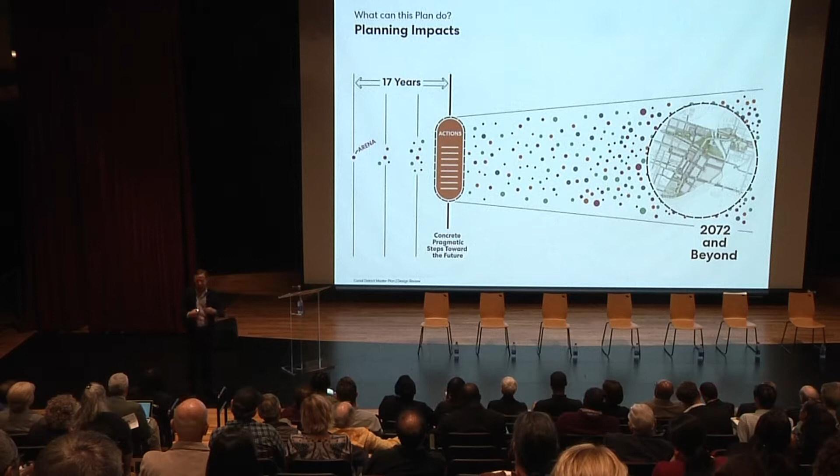So we're sowing the seeds for long-term growth, which I think is an important thing to consider, particularly if you'll entertain this abstract diagram for just a second. At some point there was one idea, one decision, and that was let's get an arena and let's put it where it was. We've been in 17 years of some incremental decision making, but there are thousands, maybe millions of decisions that have to be made before the district is fully realized.

We think it's really important, it's hard to figure out all of the things that need to happen in the middle, but we think that having a very good vision in place and a set of actions for tomorrow or for December will ensure that you can get yourself on the right path to developing that.

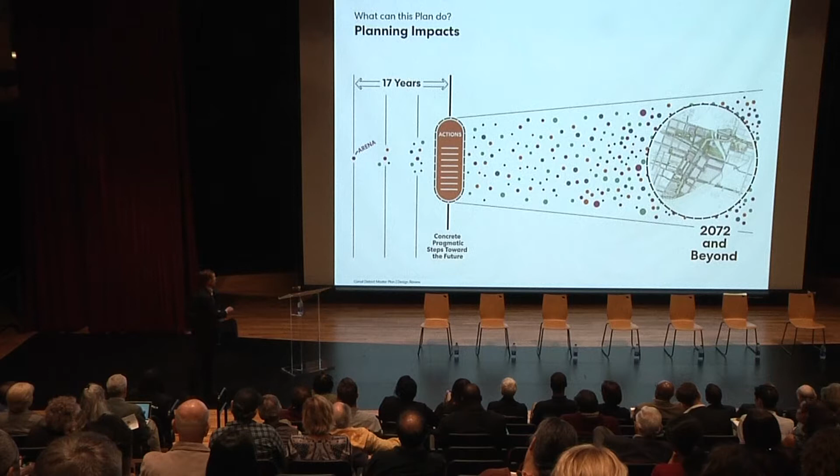So we have 20 actions that we want to talk about tonight, and I'll highlight a few of them at the end of the presentation.

We think that there are policies around how we guide the growth of the district, how we ensure that people are protected and supported, communities, how natural systems are elevated and not hidden away, are not further degraded, and then policies about how we create places for people in a wonderful city to live in.

And so from there, we have these actions. There are 20 of them, and we think there are 20 critical next steps for the project. These can be hotly debated, and we will do that.

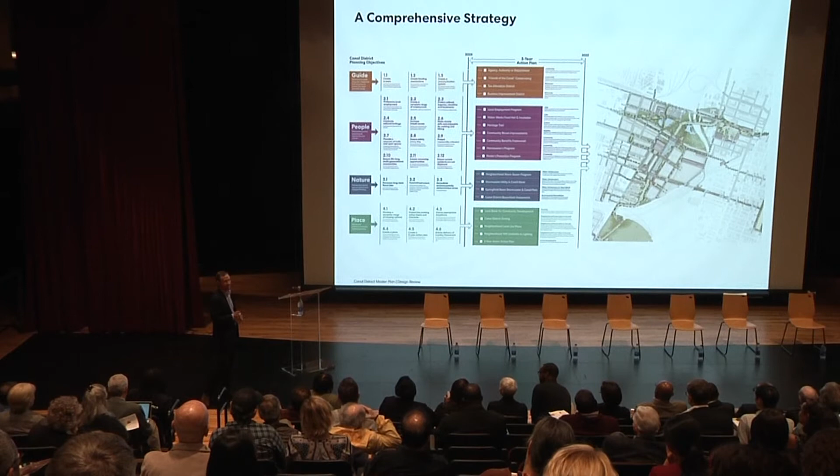Do you want to advance it up there? There we go. All right.

So if you've been to any of the Canal District meetings, we think we hear a lot about the past, and we think that there's some value in thinking about why this area of the city is the way that it is.

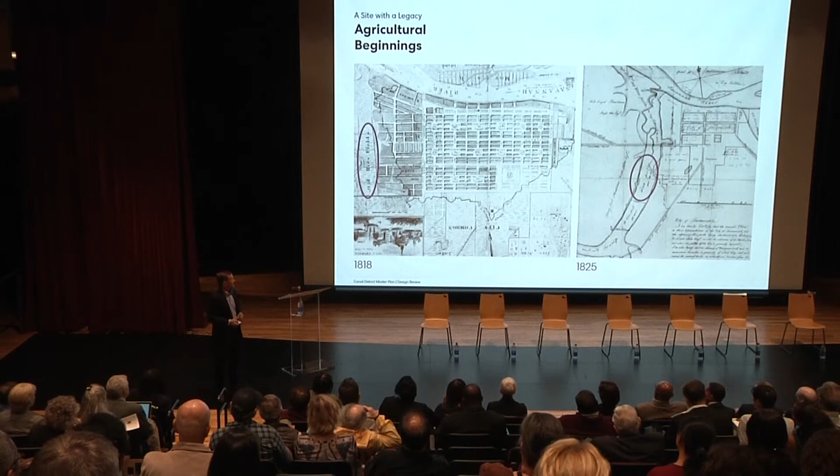Is there another one of these up there? So rice plantations, there were yellow fever epidemics, which many of you know about, and the Springfield Canal was built to drain this area to move the wet culture of crops away from the city, to move mosquitoes away from the city.

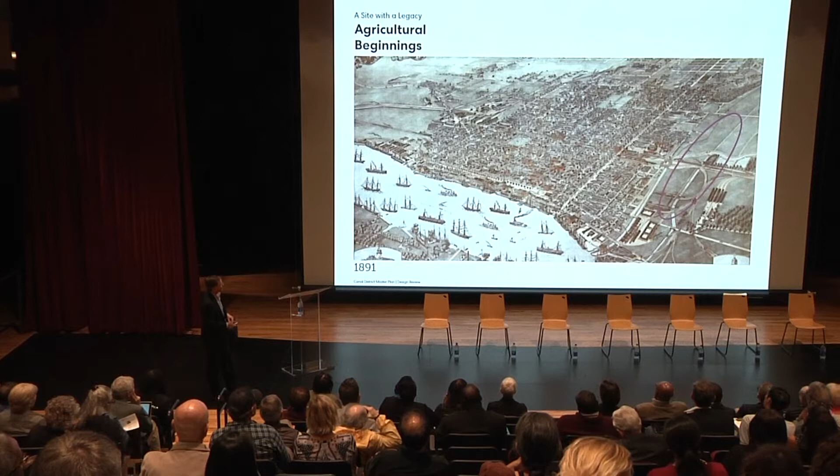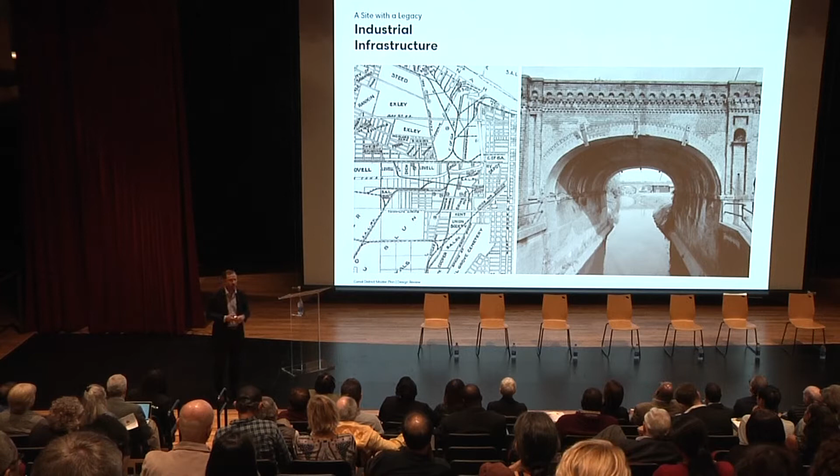This is the viaduct that's along Louisville Road, where the Springfield Canal cuts under there, going north to the river. There's also a social legacy here in place that we know is incredibly important and partially divisive in the city, but also an incredibly important basis for what you grow a community on.

And in this case, in particular, African American home ownership. There are multi-generational households that still own houses that they bought in the 1940s, and that's something for us to protect and celebrate.

Carver Village is not the only neighborhood here. There is a patchwork of neighborhoods on the west side that we think, through the development of the Canal District, there's absolutely no reason any of these neighborhoods, anyone presently living in these neighborhoods, should be displaced.

There's no name, cultural identity, anything in these places that we think is not absolutely in accordance with what the Canal District can be. So that's on the table, and we have policies we think can help support that.

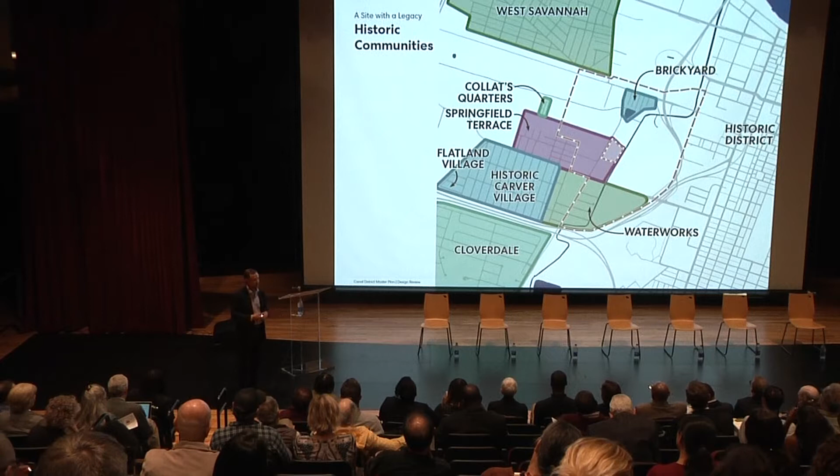So there's these three histories that weave together: social, natural, and physical. And you can see it in the city itself, and it's sort of amazing to see, the historic district and then the patchwork of the west side, and the very intentional intrusion of a large piece of highway infrastructure that's dividing the city in half.

And so there's wetland here, there's industry, and there's infrastructure that just sort of reinforces a cultural divide that's been in place forever in Savannah. And so you could say there are many different Savannahs. There's historic Savannah, and there's West Side Savannah.

There's very public history that people travel all over the world to come and visit. And then there's sort of a hidden history of the West Side that we need to bring out and express and celebrate. And in the middle, dividing these two, at least these two Savannahs, is all of this infrastructure.

And so if anything in this process, what we're trying to do is figure out a way to take the issues that are central to this project, infrastructure, water, new places for people to live, and use that as something that helps knit the community together so that we can start building one Savannah, at least in this district. So this is a central part of where we're coming from.

We think that in moving forward in the spirit of this one Savannah, there's the opportunity to create common ground here, in particular through these different systems: social systems and natural systems, and new places to host civic life. So that's what we're going to go through. I'm going to run through a series of ideas that we have about how this could develop.

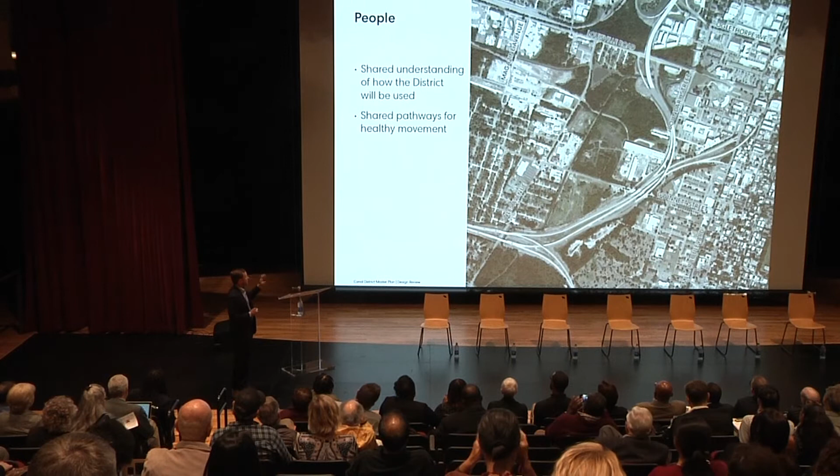So what's behind that drawing that you saw out in the lobby? We're looking at an area that's not a blank slate. These are our hand drawings, these are early ideas. The first one is that there are absolutely places that have to be protected.

There's the Waterworks neighborhood east of Stiles. There are pockets of Springfield Terrace west of Stiles. There's the entirety of the Brickyard neighborhood that sits within this orange boundary, which is what we're studying in the Canal District. There's no reason those neighborhoods need to go anywhere. So we want that. We want this plan to help support that.

And so the houses that are there, we think the houses should be there. We think more houses should go on vacant lots, and these neighborhoods need to be supported and reinforced.

There are also historic structures throughout the district. Not a lot, but some very significant ones: bridges, railways that we think could be repurposed. The Waterworks building stands out, as does the old Pearl Smith School. These are real foundational elements that in the long run will thread history and character through the Canal District.

After the places we protect, we think there are places where nature needs to be rebuilt and celebrated. In particular, there's large patches of habitat and wetlands in the north side and also in the southern portion as the Springfield Canal comes from under the highway from Cloverdale. We think at least in those places that nature needs to be rebuilt and people need to be given access to that space. I'll show some images later.

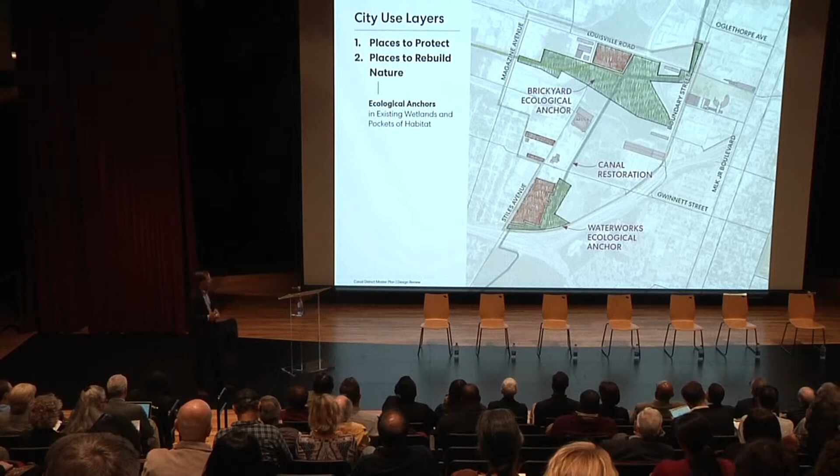And the canal needs to be cleaned and restored. The water is dirty, it needs to be cleaned, the banks are crumbling, they need to not be crumbling. So at a minimum, those things need to happen. Many of you know this, but some of you maybe haven't walked all through this area of the city. But there are amazing moments, and there are also some very degraded ecosystems.

This is in the back of the Brickyard neighborhood, and many of you know the viaduct and the canal there.

In addition to these natural places, a lot of water flows through this area up to the Savannah River. We think we need to support that and support natural systems, but in the center of this place, in particular next to the arena, we think there needs to be a new civic space for the city, a different type of park, a gathering place, something as significant as the other great parks in the city. It just so happens a lot of water is running through there, so that needs to be a place that also supports the flow of water and ecosystems.

So we have some ideas about that. That idea of a civic space has always been a part of the arena ideas. This is the current design of the arena itself from sort of this point up. This point down is still being designed, but we think this, in addition to space on the other side of the canal, has the opportunity to be something really glorious.

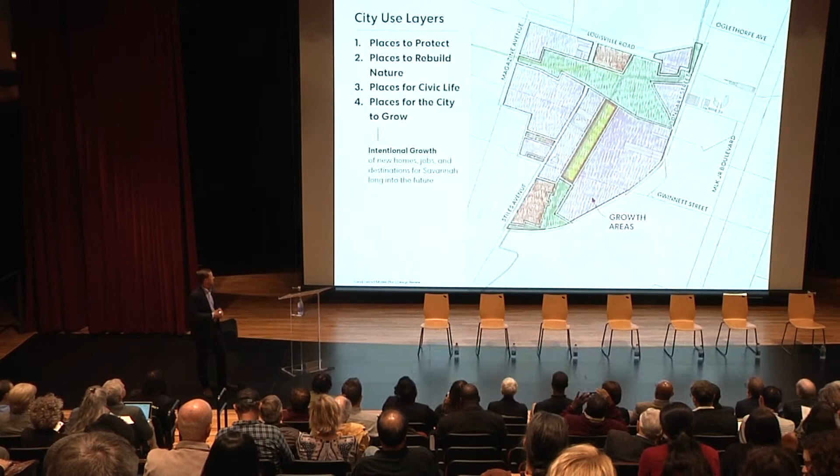Around that framework of protected places, natural places, and civic spaces, we think there's a lot of area for the city to grow long-term. This is a place that if we can handle stormwater correctly and build a civic foundation, the city can grow here. That means new places for people to live, new jobs, new destinations, new activities. So this is sort of a basic use of the city that we see possible.

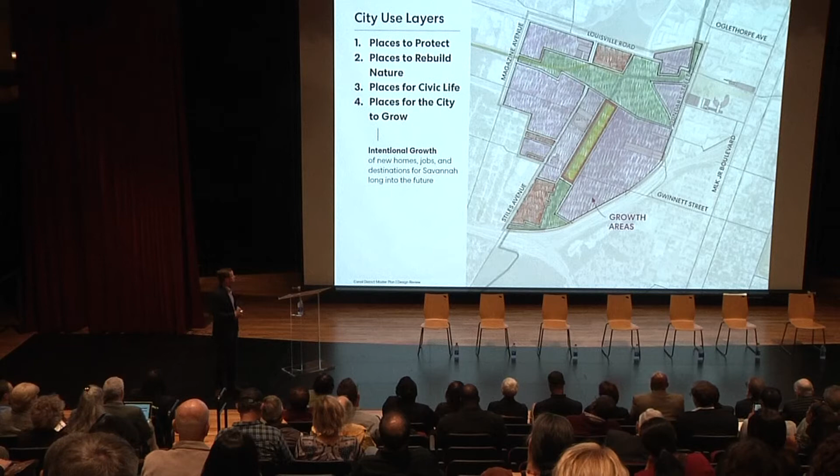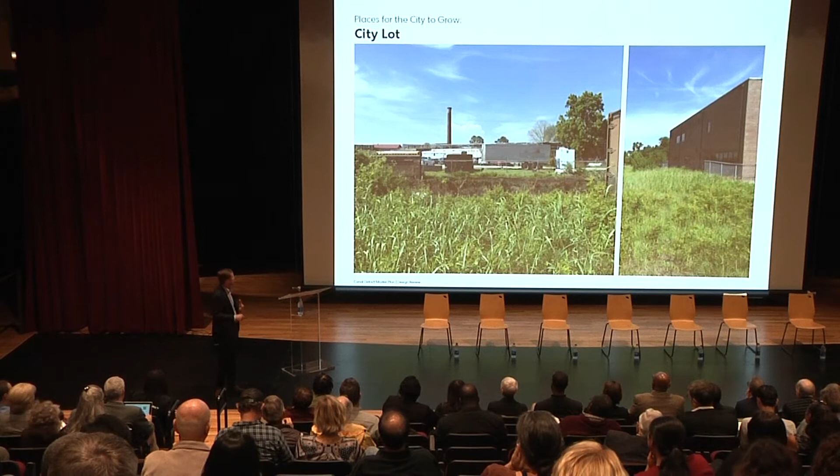Some of those spaces you know well. A great example is the balance of the city lot south of where the arena is going to locate. Once the city services, the trash and everything come off, this is the kind of place that needs to be reused and repurposed and put back into greater service for the city itself.

Through the district, we need to think about new infrastructure that connects people together - not people in cars, not machines, but actual people, social forms of mobility. These ideas are nothing new, but we think this district needs to be threaded through with pedestrian and bicycle paths as primary pieces of infrastructure.

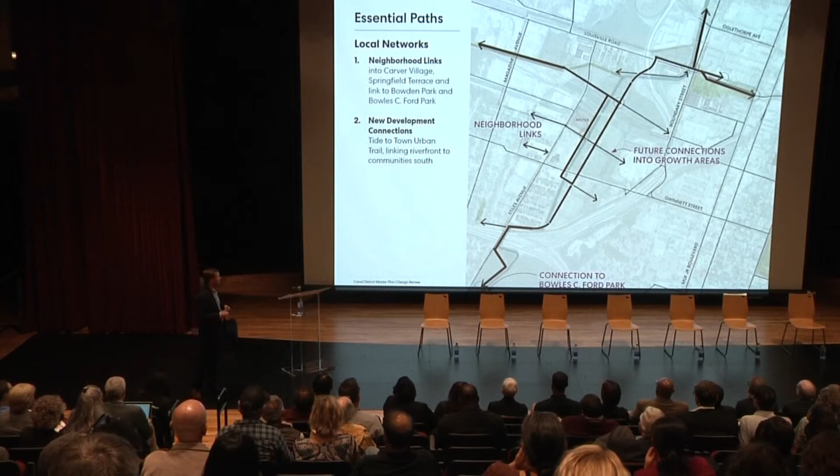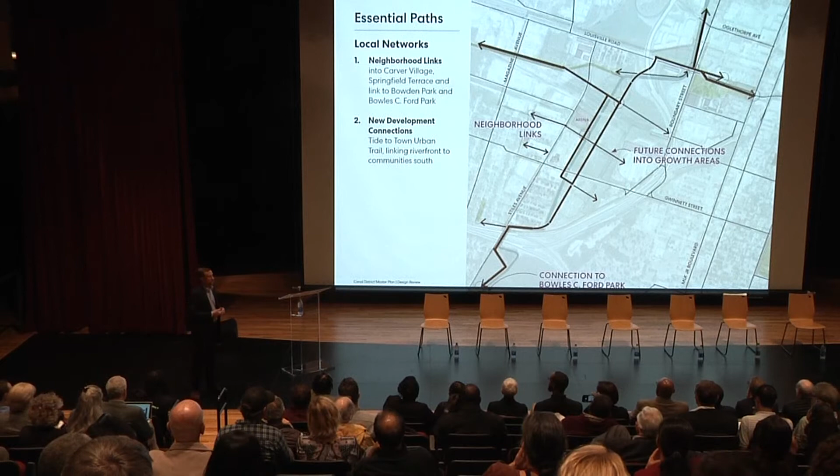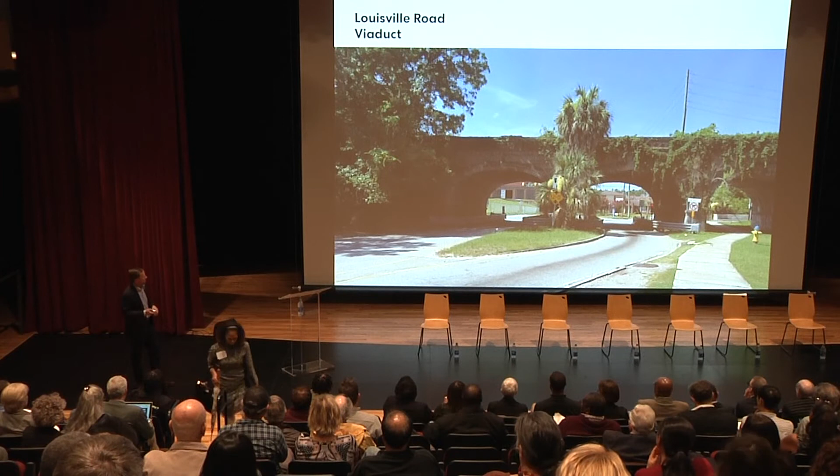In addition to that primary spine, there needs to be many more connections, and these are not all of them. But there needs to be connections into areas the city is going to grow, connections into existing communities and existing assets like existing parks. Between the old Waterworks building and the Pearl Smith School, there needs to be many places for humans to connect through this district. There are assets sitting there now, pieces of infrastructure that used to connect long distances through the railroad, and we think these can be repurposed to help serve this role of connectivity.

This is that old viaduct along Louisville Road, the old Central of Georgia, and the highway coming and swooping over and going up to South Carolina. This is the Visitor Center, the Georgia Coastal Center, and Battlefield Park. We've been studying this area, and we know there are many ways people are going to move in and through it.

Boundary Street is very important, Cohen Street is very important, but we think there could be a new system put in place in this area that's sort of a premium amenity - like the highway is for driving - something to get pedestrians back and forth into the historic district.

This drawing shows a connection over to MLK with a new sidewalk and a path that would come along, a new bridge where there used to be an old bridge that crossed over between those viaducts, a connection at Louisville Road that would bring people down to the canal and in, and then back up to the Savannah River.

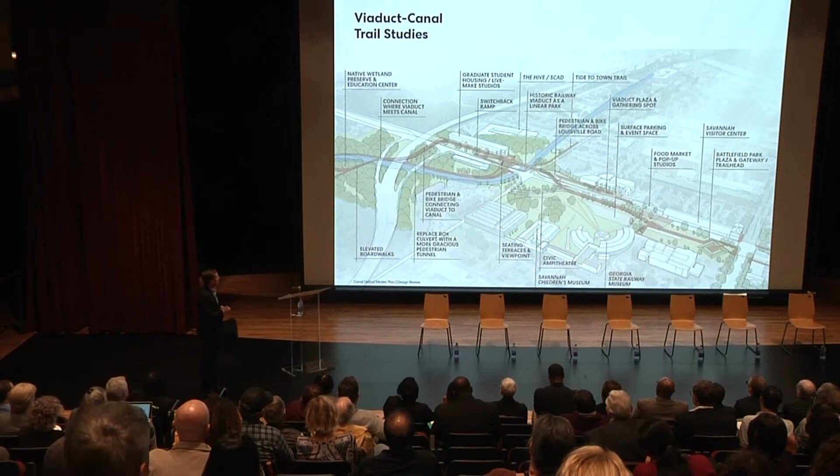We think it's also possible, and maybe one of the best long-term opportunities for a very strong pedestrian connection, is a bridge that could come off that embankment along Louisville Road and thread through this space and then go into the Canal District. We think this is a big opportunity.

It's an opportunity not just to move people back and forth through healthy mobility, but also an opportunity for a cultural overlay. In this case, connecting Battlefield Park to the west side, we think there are memorials, historic opportunities, new trailheads that can be associated with it, heightening the identity and the history that's been obscured on the west side as part of the larger narrative of Savannah.

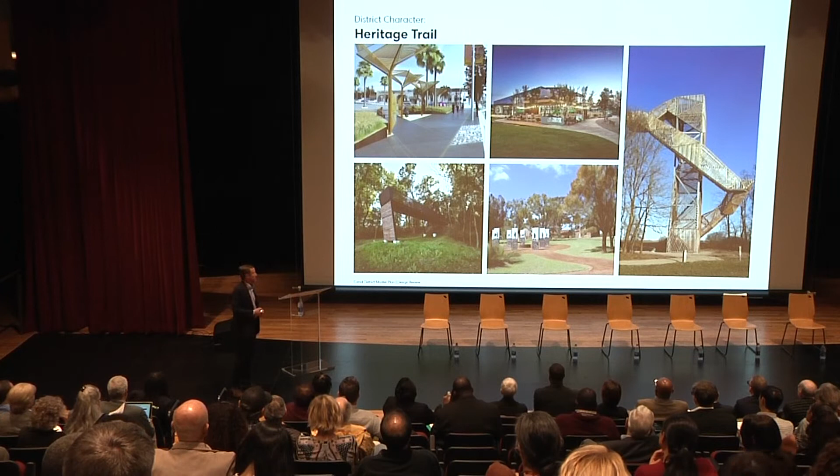This path network also has the potential to expose people to new environments they don't see. Some of those natural areas I showed earlier are wet and will need boardwalks. Some are under pieces of infrastructure and could actually be a very exciting place to be. Some are within parks that are wet and need to express the ecology of this area. We think this is a real opportunity.

Not only is it an opportunity to create place and generate a lot of interest in this area, but we think it also has the potential to move a lot of people. So one of the recommendations we're putting on the table is that for the arena itself, its mobility picture, we try to limit the number of trips to only 50% of people parking in the district.

The rest will be moving through rideshare, shuttles, and bicycles. For the long-term success of the district, we think shuttles, transit, bicycling, and walking provide the most value to you, most value for your dollar, most value in terms of place creation. So this is something we're putting out here, and hopefully the panel tonight will debate some of that.

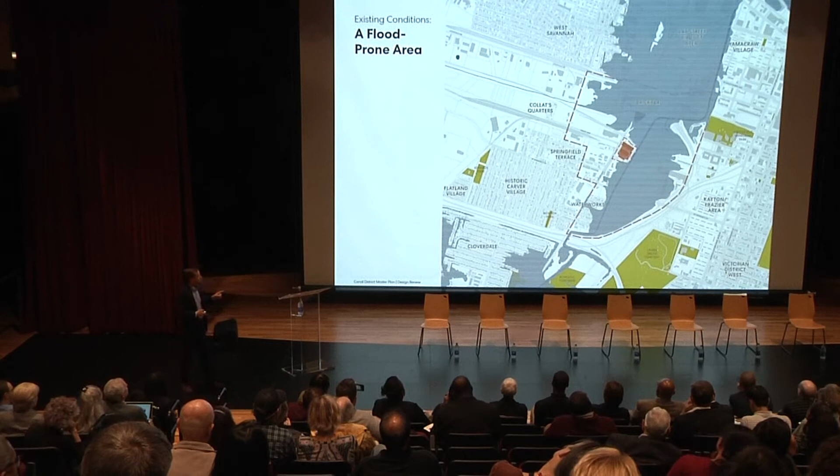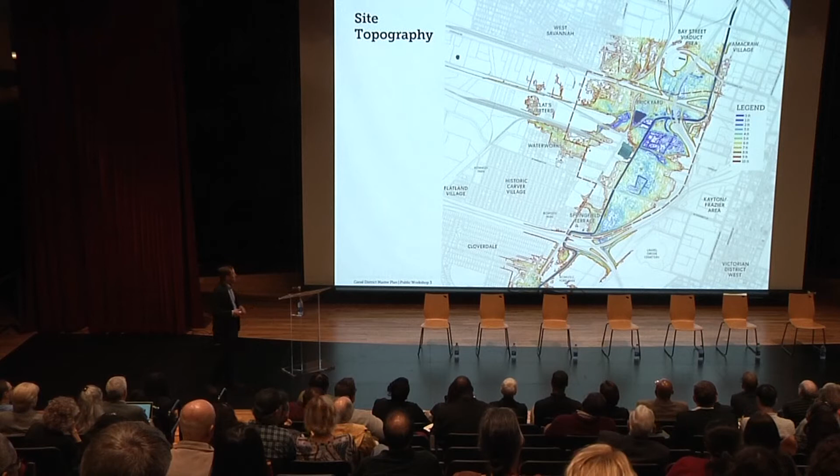But it means that on an average day, you've got houses - we'll call this the Waterworks neighborhood - and a little canal there that is not sufficient to handle the flow of stormwater moving through this area. What happens is it overfills its banks, and pipes that need to drain back up, and you get flooding in the neighborhood.

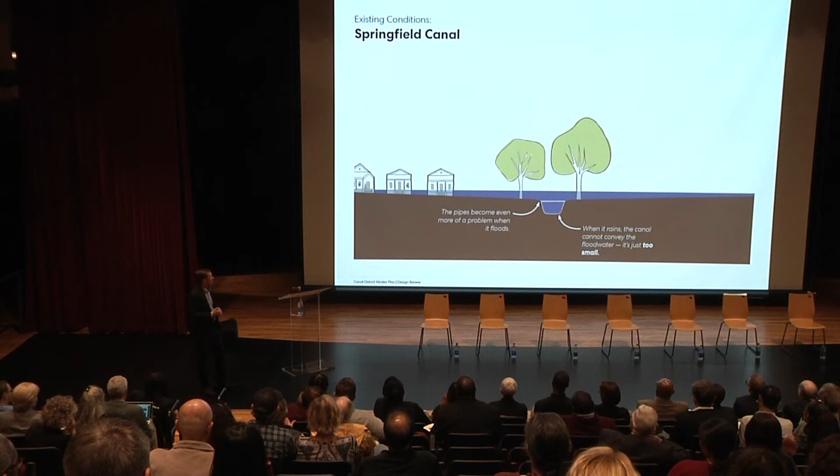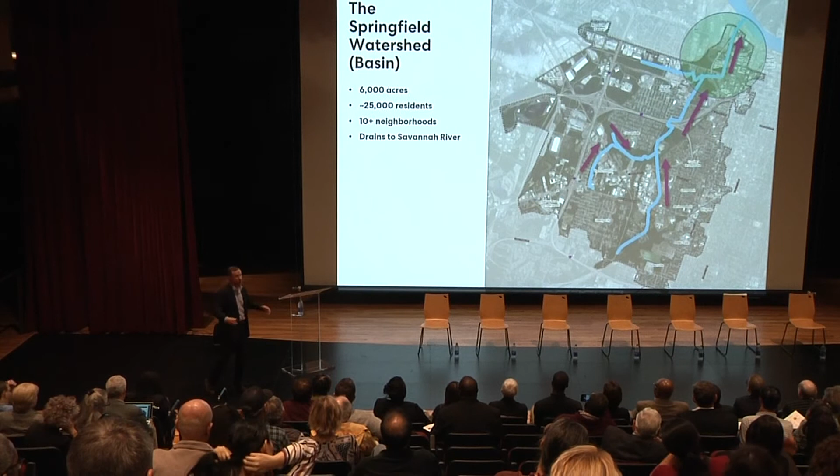Through this process, we're presently studying the movement of water in this whole basin. Just as a point of reference, the Canal District area we're studying is here - this is miles south. So a drop of water lands down here, headed to the Savannah River, and goes through here. As that drop of water moves along, it collects a lot more drops of water, and huge volumes come through here.

So what we need is more space for the water to flow - a wider canal that acts as a floodway to move that water through. There also needs to be a place to hold some of the stormwater to mitigate the floodplain for this area. As a working proposition, we're saying a stormwater park and a floodway canal to be widened to reduce the risk of flooding in this district, not just in new places that people may build, but in the neighborhoods that are there now.

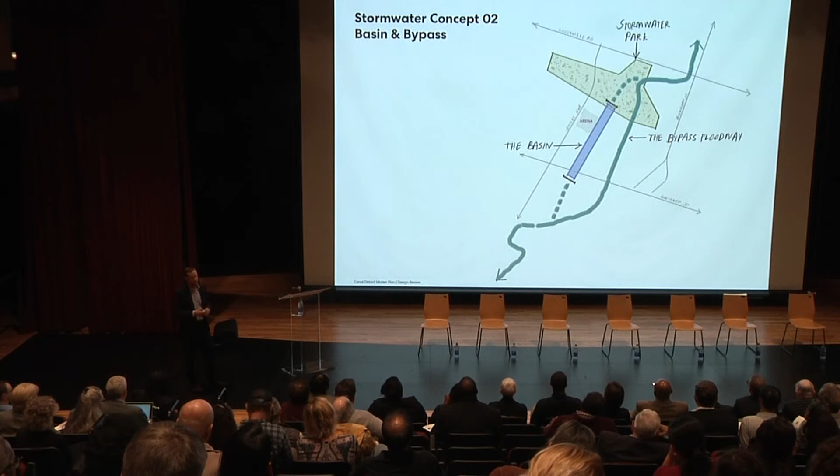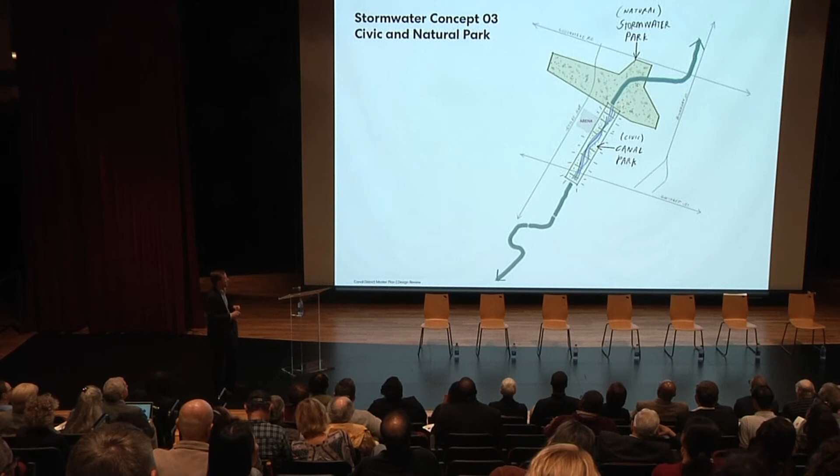We studied different ways the canal could work - the idea that you could do a bypass and create sort of a basin where there could be more of an amenity there. Right now, we think the best idea we can come up with is that this park needs to be a heightened expression of how water moves through here. I'll show you that now.

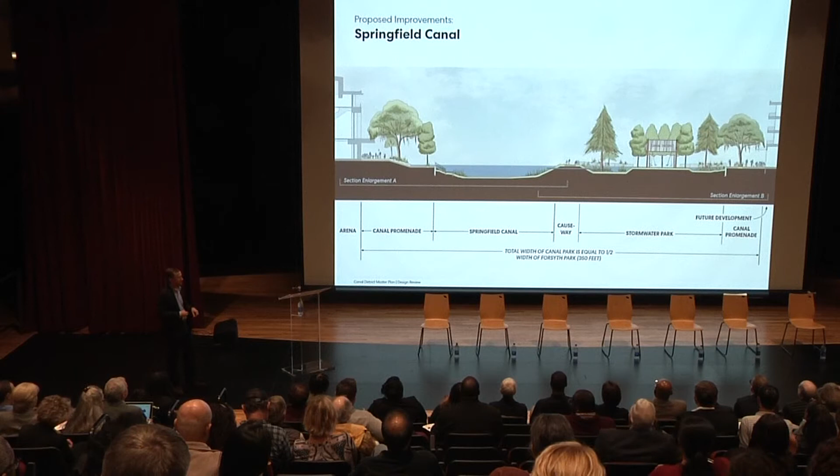This is an idea we have - you can see the arena here on the left side. This is the floodway essentially, and we think you can create a wetland park on the other side of this, so that when flood volumes of water come through, the water can back up into this area, and when it retreats, there's an actual amenity here. This is not something new or made up - it exists in other places and can be done here.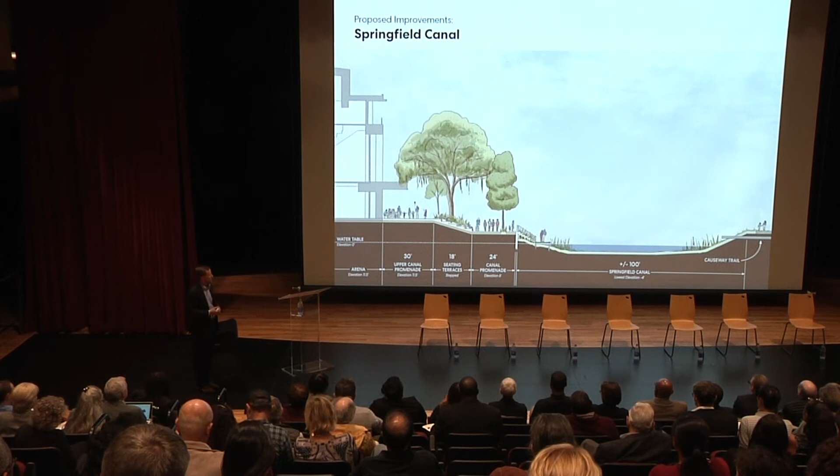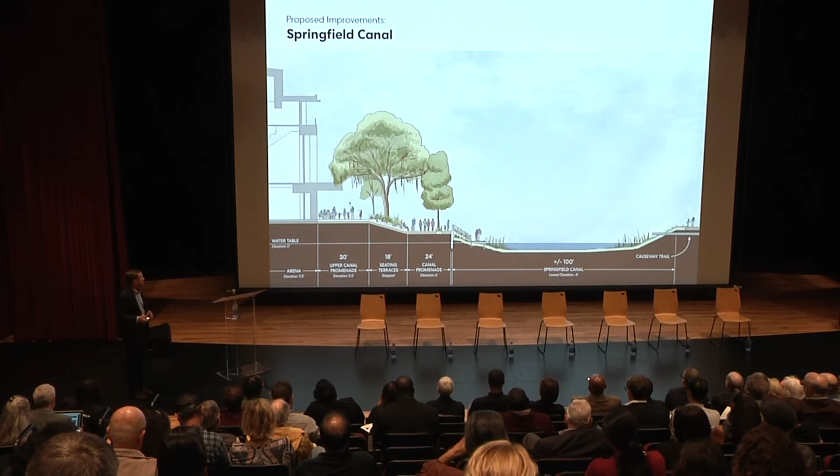You can see this is the level of the water, and this is the arena. What we're proposing is to excavate down a little bit below the water table and build wetlands along the edge of the canal. This will help clean the water and also help create an amenity. You may have seen these drawings out in the lobby, and I encourage you to take a look at them. They're both fun, but also very serious.

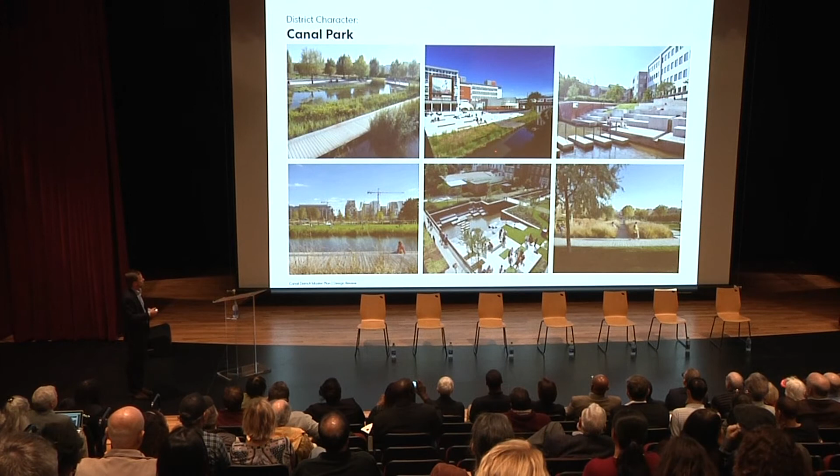And it can make great spaces. We've pulled some images of a wetland park in a flat, wet area, with boardwalks moving through spaces like this, and gathering places like arenas with steps that go down about 12 feet, the distance from the arena level down to the water, creating great places for people to gather.

On the north side, where we were showing the larger stormwater park, the Savannah-Ogeechee path comes in along with the old Savannah-Ogeechee Canal. We think a more natural space can and should be built there—natural, but giving people a little bit of access with a few moments in that space for gathering.

So that's place, the natural systems with place. We wanted to start with the streets.

I think it's incontrovertible that Savannah has some of the greatest streets in the world, definitely in this country. It's known as a place you can walk. These are great streets, and this isn't a point of comparison between the historic district and any place else—there are just great streets here, shady and wonderful to walk down.

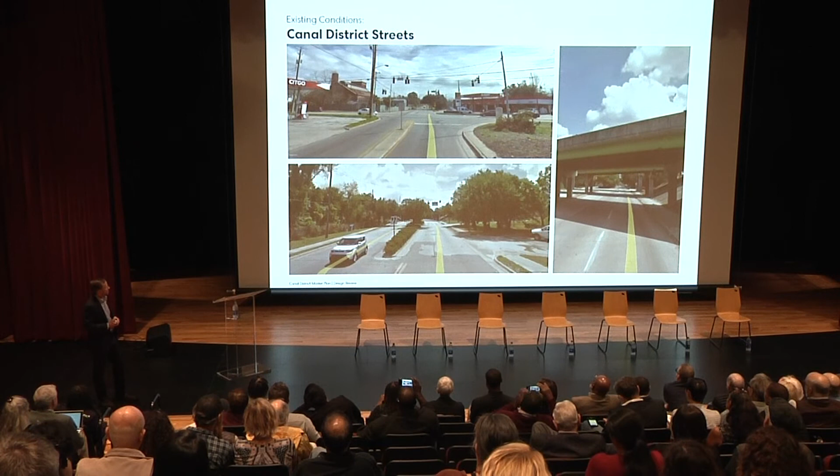Those shady, wonderful streets are not currently present in the Canal District. These are views of streets like Gwinnett and Stiles, and they're not very hospitable places to walk, so we think that needs to change through the course of this project.

In addition, shown in purple, we think there's a whole range of other street projects needed: work on Stiles south of Gwinnett, the west side of Gwinnett going into historic Harbor Village, ensuring a great connection over to Bowles C. Ford Park, and Boundary and Louisville Roads. All the intersections—signalization, timing, broken sidewalks and curbs—need to be elevated as part of this project.

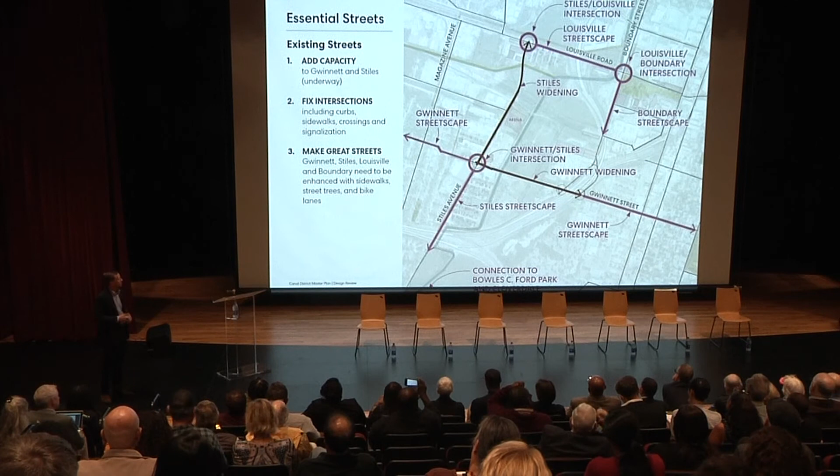There are existing streets like Stiles Avenue adjacent to the arena that need a remake, so we're starting to look at street sections, sidewalk zones, planting, medians, and lanes that can be repurposed for dedicated shuttle traffic around events at the arena.

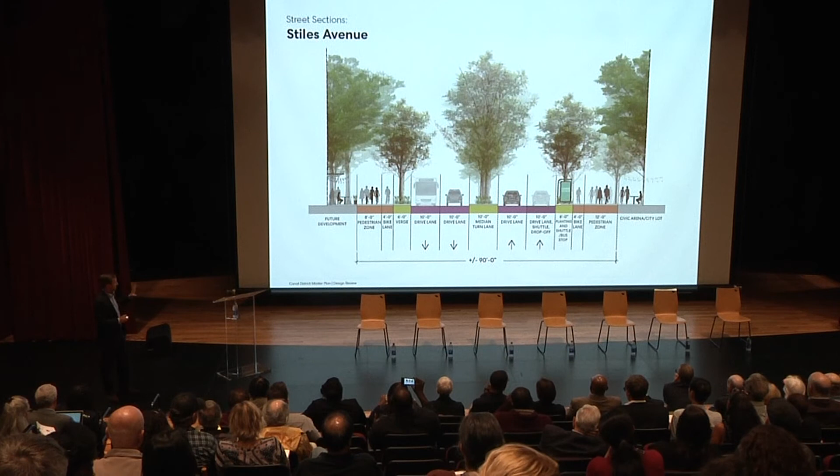There are also new streets that will be needed, and the most prominent, we think, is Cohen Street, west of Boundary. We think it should be extended all the way over to Stiles and beyond to Magazine Avenue, creating a great new street with long-term potential to be connected across the flyovers and off-ramps from the expressway into the historic district.

This main framework also needs other connections from Cohen down to Gwinnett Street. These are sketches, and all of this needs to be worked out, but we think it's a good idea.

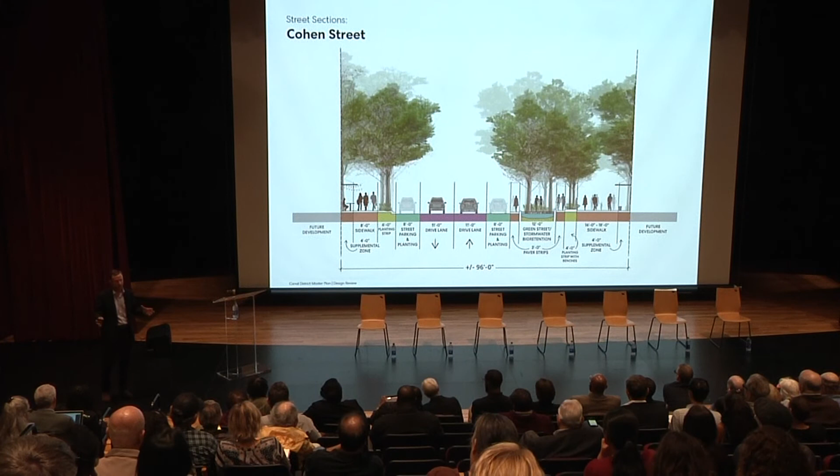Cohen Street, because it moves in the direction of the canal, we think plays a role in stormwater management, so there needs to be Green Street components where stormwater is collected and cleaned as it moves its way to the canal.

There's a whole network of smaller streets that will come as part of incremental redevelopment on different properties, and through this network you eventually get a public framework of new streets, new civic spaces, new natural places, and places where ultimately the city will grow. In this plan, we think there's reinvestment in the neighborhood, and there need to be planning recommendations that work on transition zones, but this is a basic framework for growth.

Within this, there are also ideas we have for new places, things we hear from you that we're bringing forward, like the idea of using the old Waterworks building to reestablish a municipal market in Savannah. There used to be the city market. It seems like this would be a great place to bring healthy food into this community and also dovetail with the arena. On top of the market, we think this could be a location for job incubation and business incubation, particularly around food. This is an exciting idea for us.

We also think of the new places that might evolve as the city lot. When we were out there for the groundbreaking, if many of you were out there, it had a wonderful festival atmosphere, and we think that can continue to be cultivated with interim uses—food trucks, places for people to have a drink before or after a game, places for people to gather—sort of a midway space between the Waterworks building and the arena.

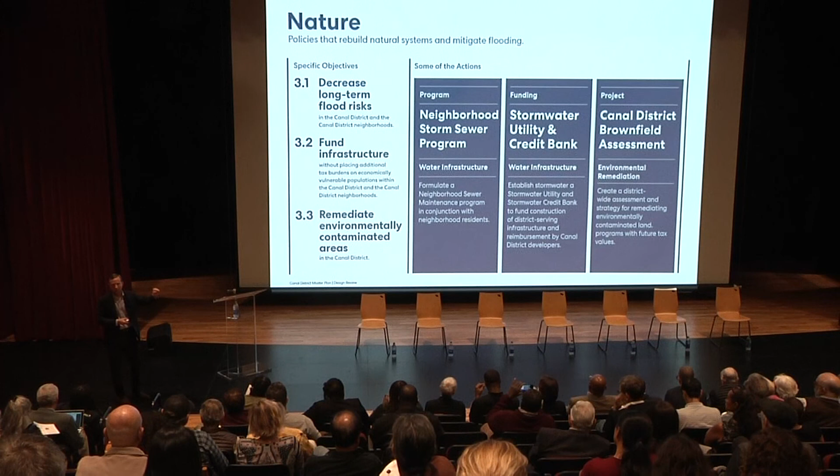There needs to be new ways to fund stormwater improvements in the city—a new utility, a credit bank to help the city build district amenities—and then charge future developers for the use of that stormwater infrastructure. This is done elsewhere, very important. A district-wide brownfield assessment—we need to know what's out there, what's in the soil, and how we can make sure that doesn't stand in the way of polluting people's neighborhoods and inhibiting future development. And a neighborhood storm sewer program that allows people to report incidents of flooding and get appropriate action.

The last piece, which I think is very important but pretty standard practice, is there needs to be a set of new zoning regulations. The zoning needs to be changed in this area to ensure appropriate development and an overlay of protections into the community to help with transitions. There's a great idea about a lighting program, one for public safety, that could be tuned around events at the arena so there's not always blaring light in the neighborhood. You do that with Wi-Fi too, which could be an umbrella for this neighborhood to give people access to the internet. There needs to be a 3-year action plan for the arena and its infrastructure, and it needs to be carried through.

These are some of the things that are on that list outside. These are big items, and so they need to be hotly debated.